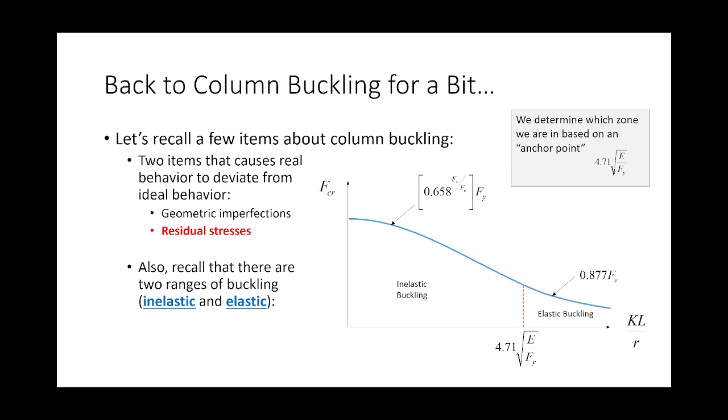Okay? Now, let's go back to column land. What were the two reasons that real behavior deviated from ideal behavior? Geometric imperfections and residual stresses. And the reason why I highlight the residual stresses is because residual stresses is what affects this. Elastic buckling is affected more by geometric imperfections because it's elastic. It doesn't have anything to do with locked-in residual stresses because we're not talking about yielding there. Okay, does that make sense so far?

Okay. Just keep that stuff in the back of your head, and now we're going to talk about LTB, okay? Now, if this is the AISC curve for column buckling, I am going to show you the AISC curve for beam buckling, okay? So we're going to talk about 3 zones of capacity and the anchor points that split them, and then we're going to talk about the effect of Cb and how Cb actually plays into things. So, if we look at the capacity of a W shape, it is split into 3 zones, not 2, okay?

So the way that we define that according to AISC is we have 2 buckling zones, like an inelastic buckling zone and an elastic buckling zone. But then we also have our zone at the very beginning, which is just the full plastic moment, okay? So in other words, what we have is our graph, right? And instead of a single point that defines whether or not we're in inelastic or elastic, we have 2, right? And so this right here is zone 1, this right here is zone 2, zone 3.

Okay? And zone 3 is our elastic buckling. Zone 2 is inelastic. Zone 1 is full plastic moment. Okay? And so where these are split up are by what are called these anchor points. So if you remember, let me erase these right here so we can kind of see this. If you remember, we're trying to look at LB plotted against MN. And so we split these up by these anchor points, LP and LR.

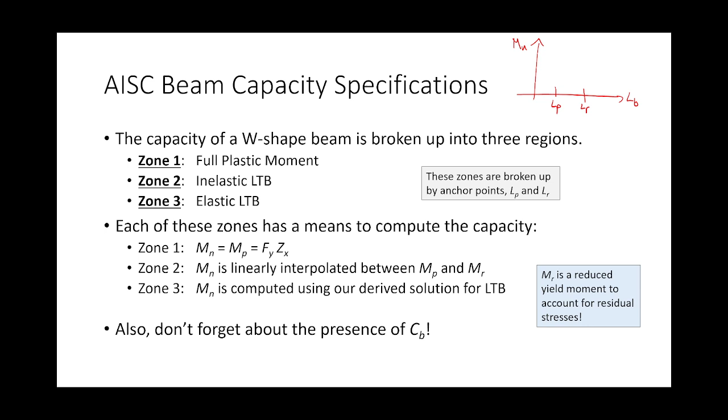Zone 2 is a linear relationship. It's a linear fit between MP and this term MR. And what is MR? It's just the yield moment that's been reduced a little bit. And so we reduce it 30% to account for the presence of residual stresses. So that's what MR is. So if MP is FYZX, MR is FYSX times 0.7. That 0.7 is not a safety factor. If you get asked, no, it's not a safety factor. It's accounting for the residual stresses locked into the shape. Okay? Make sense?

Okay, now this is a line. Lines are defined by slopes. We call the slope of that line the beam factor. And so all the beam factor is just change in y over change in x, and so you can compute that pretty easily right here. Zone 3, this is the elastic LTB curve that we previously derived. It's written a little differently, but it's the same solution. Okay, I want to stop for a sec to see if this makes sense.

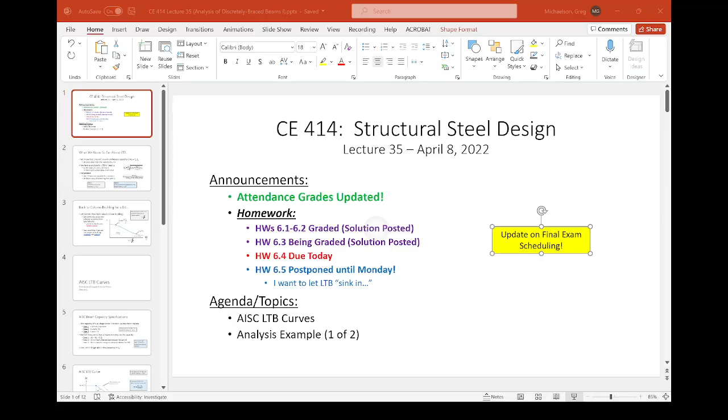Remember I told you there's all those values that, oh, we'll use them. We're using them. Isn't that exciting? The Zx tables. 6.78 for a W24 by 76. What do you want? The Lp. 6.78. Here, I'll write that on the board. Okay. So, Lp, and then Lr.

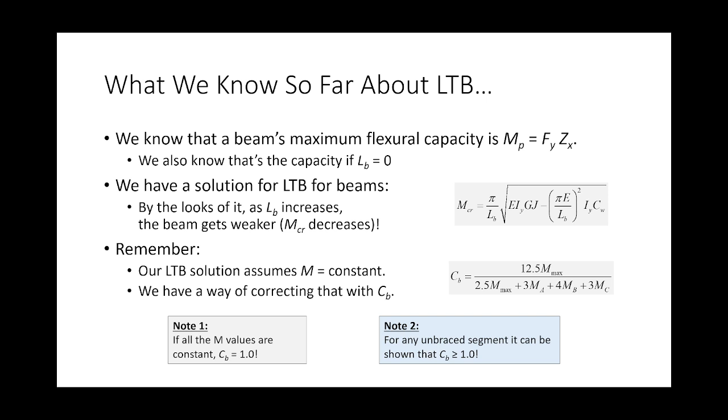Lp and Lr are what we call the anchor points that help us determine which zone that we're in. Lr is really nasty. Lp is actually pretty easy. What if I told you that it might seem counterintuitive, but it's actually much harder to derive Lp than it is Lr? Lr, while very nasty, is just algebra. All you do is, here's how you derive Lr. I'll tell you exactly how you derive Lr. All you do is you take this equation, set it equal to 0.7 Fy Sx, and just solve for L. That's all you do. It's nasty, and so you've got square roots inside of square roots, but that's it, right? All this 6.76, all that is just taking our material constants and coming up with some constant values to go for it.

I actually have a derivation of this. It's not hard. It's actually, I mean, it's algebra. It's a lot of alphabet soup, but it's not difficult. This is a little bit more difficult. You actually have to go and test beams and run a lot of analyses, and it requires some decision making in terms of where are we going to call the ball as to whether or not buckling's an impact or not. It's actually quite difficult to get that done well. But suffice to say, it doesn't really matter.

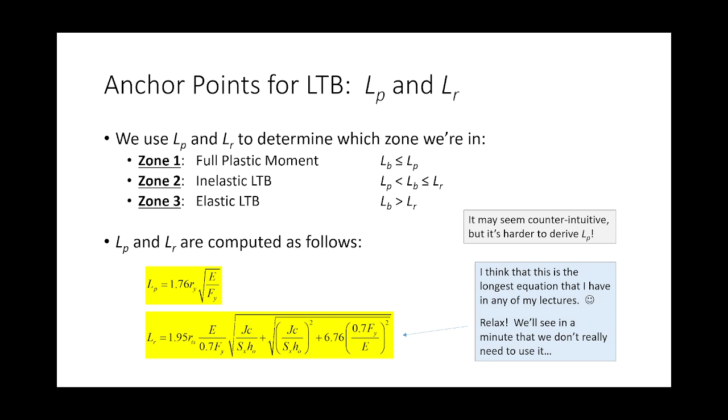It doesn't really matter because table 3-2 computes it for us. Now, zone 1 is easy. Zone 1 is just FYZX. Just plug and chug. Zone 2, however, is a linear interpolation.

Now, if you open the manual, this is what it looks like, right? CB times this quantity less than or equal to MP. So let's think about that. What's in the brackets is just the raw capacity, right? And so what the spec is saying is, what you need to do is multiply by CB, but I don't care what CB does, you're taking the minimum of that and MP. That's what you're doing.

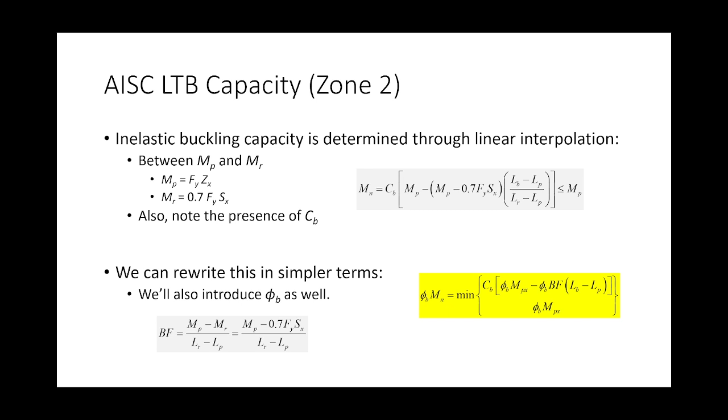So, what the spec also does, makes our life a little easier, is what we go from here to here. This BF term is just the slope of that line. We call it a beam factor. And so we can take this equation and simplify it a whole lot with this. For table 3-2, do you see beam factors listed? Look at that. By golly gosh gee, there's some BF values listed. It's almost like the manual's trying to make it easier on us. This is what you spent your money on, because if not, you'd have to compute this for every beam, and it'd be a pain, believe me.

So, zone 3 is our LTB, our DiffEQ solution. It looks different. I'm going to tell you why it looks different. The reason is that this solution is really derived specifically for doubly symmetric I shapes, like wide flanges, right? So a W24x76 is doubly symmetric. It's the same size top and bottom flange. That's fine. But for bridge plate girders, for example, you will have different size flanges, okay? And suddenly, the solution that we derived doesn't quite work.

But you do a little bit of algebra, a little bit of analysis, and what you find is that there is a similar solution that looks a lot like this that's in the bridge spec. So the reason they reformulated the expression a little bit is so that when you are designing a plate girder for a bridge that's singly symmetric, and you look at the expressions, they're very, very similar. So it's a lot easier for you to pick up how to do bridge calculations as opposed to building calculations. Now, a couple things to keep in mind. Number one, there really isn't a pretty design aid for this one. You kind of just have to chug your way through it.

There are more properties that you are going to need, but you can look these properties up in table 1-1. You do need the torsional constant. You need the section modulus. There's a couple other things that you need. One of them is H0. H0 is the distance from center of flange to center of flange, so it's a lookup. You can find it in table 1-1. And then also RTS. RTS is sort of a radius of gyration for LTB. It's kind of like a torsional R value. Again, it's just a lookup.

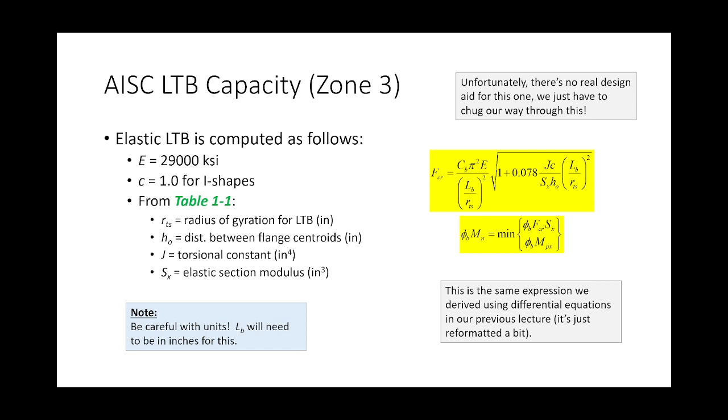It's plug and chug. When you're using this expression, be very careful with units, right? Because RTS values tend to be in inches, and it's very common for LB values to be in feet. And so if you take LB over RTS, this needs to be in inches. So make sure that you're being cognizant of that. Okay, with me so far? Now, I think it's on the next slide.

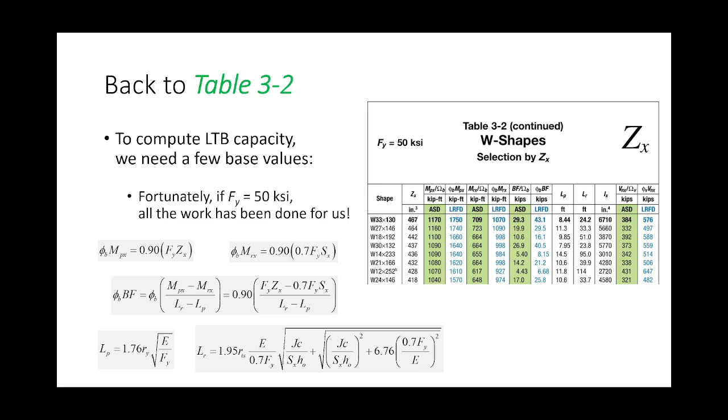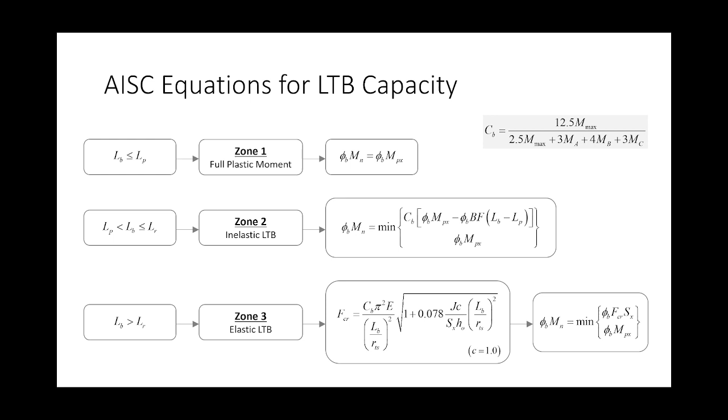Well, by golly gosh gee, it's almost like I planned this out or something, right? You know, look at me.

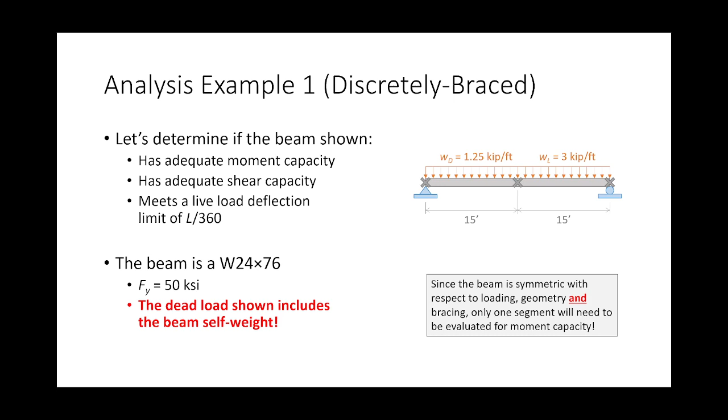Now, the dead load shown includes the beam self-weight. Since the beam is symmetric with respect to loading and geometry, we're only going to need to consider one segment. Let me put this in the notebook, and let's get rocking and rolling.

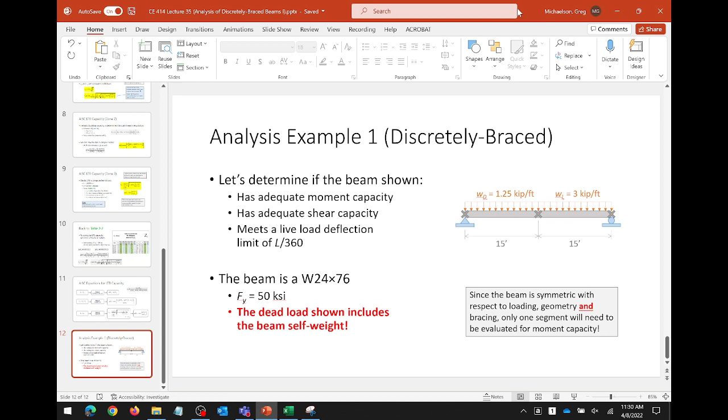Where's my, I'll just do it this way. Hold on. Let's see if it still works. I take the pen. Just think that's cool.

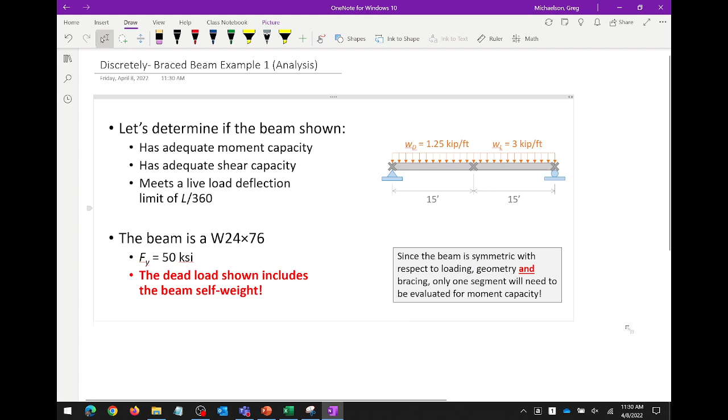Okay. I'll give everybody a sec to copy this down because this is kind of important. It's a simply supported beam with a uniformly distributed load. I wonder if anybody can tell me what CB is going to be for each of these segments.

This one's the 1.3. It was 1.14 for the whole, yeah. Again, it's like I planned that out or something. It's crazy, isn't it? Are you saying you plan the lectures? No, I don't. It's just serendipity. You're giving me way too much credit. I bet Alejandro does. Oh, yeah. I'm just taking credit for his work. All right. Get that out of the way.

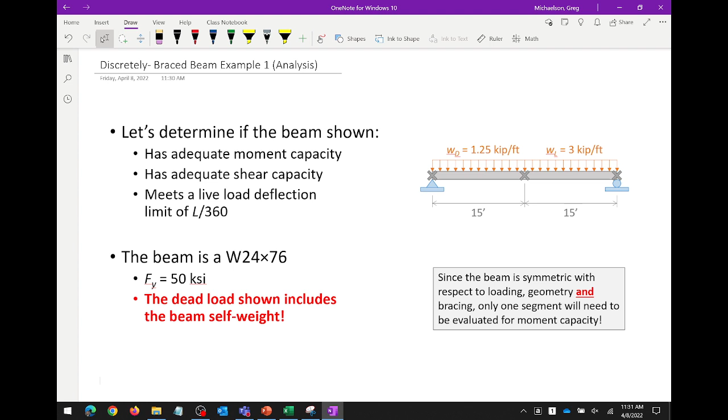Okay. So again, I'm not giving you a homework this weekend because I want this to seep in, and we're going to probably do some more examples to sort of flesh all this out. Now, let's look at the structural analysis component a little bit.

First off, this beam is simply supported, subjected to a uniformly distributed load. Did everybody find table 3-1? We didn't actually talk about it, but I did reference it on the homework. If you open up to table 3-1, it will list CB values for common cases, common instances of analysis loads. A simply supported beam subjected to a uniformly distributed load is among the most common. So CB for both of these segments is going to be 1.3.

So far, so good? Now, if we want to pull a sneaky, what we could do is look at this little guide, and we could probably use it to help predict what the capacity is going to be. But we'll go back to that. We'll see if this guide works, or maybe I made a mistake with putting the programming together. We'll see.

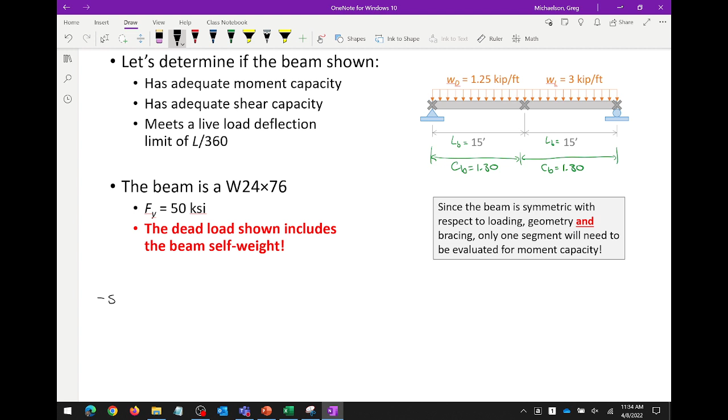So the first thing I'm going to do is go ahead and just factor the load, 1.2 W dead plus 1.6 W live. And this is a fine approach because both the dead load and the live load are both uniformly distributed loads across the entire span. Now, why am I not accounting for the beam self-weight right here? So I don't need to do that.

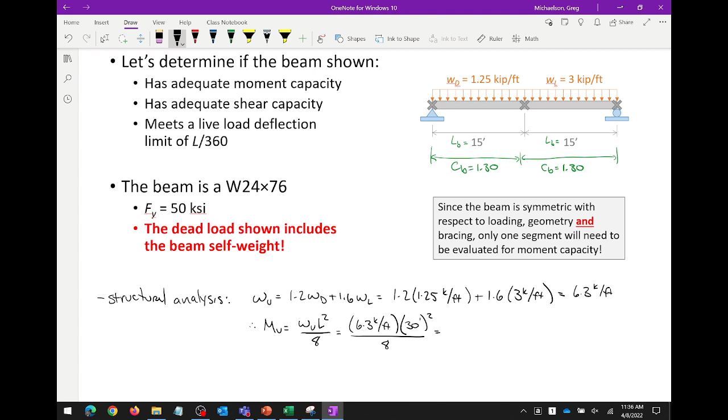So let's look at the capacity. We were given a W24 by 76. All right. So we're going to go to table 3-2. Okay, so the first thing I'm going to do is look up LP and LR. But by golly gosh gee, I already did that. And I got 6.78 feet, 19.5 feet. And from these, I look at my LB. My LB is 15 feet. What does that tell me? Zone 2. Right? And so what I can do, I can say, hold on, let's go to this.

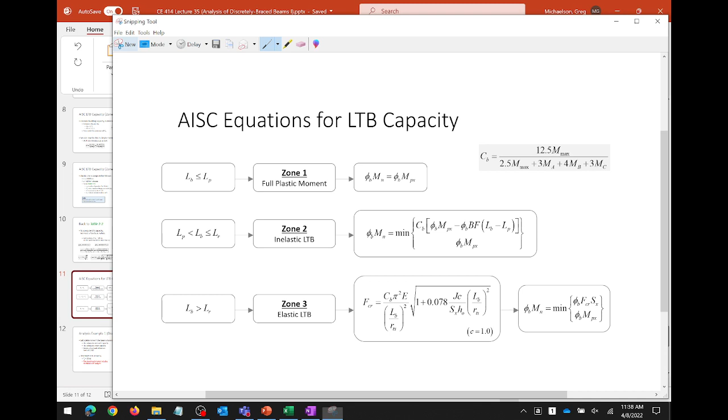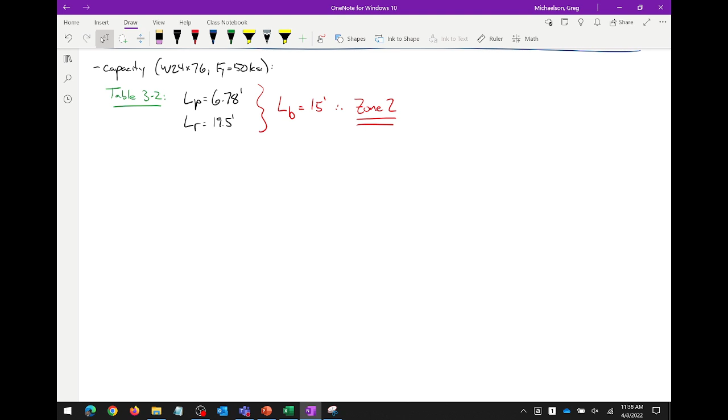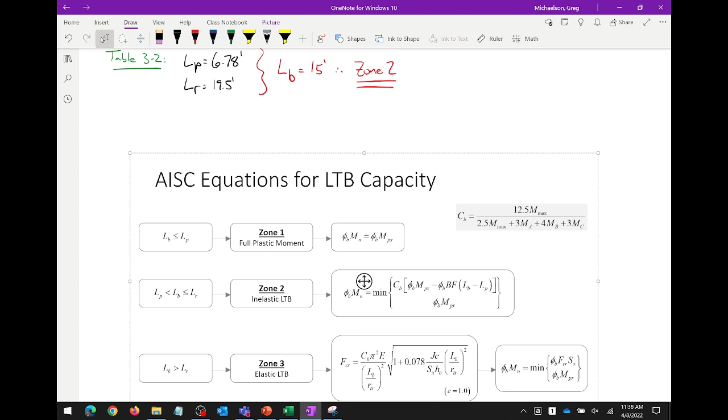All right. So we're in zone 2, right? Because LB is between LP and LR, what we're going to be using as a capacity check is this term right here, okay? So we need a couple of things. We need CB, we need phi b BF, phi b Mpx, etc. So how's this going to work? So what's CB? Well, that's 1.30. We just looked that up. What about phi b Mpx? What was that? 750.

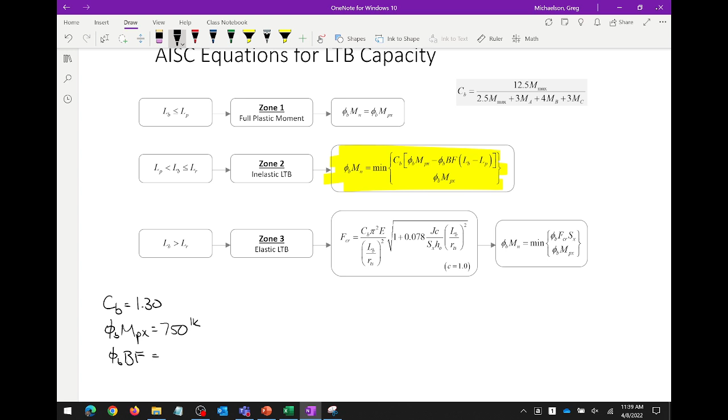What about this beam factor? What is that? And notice the units. 22.6 what? Kips. Because it's the slope of that line, so you take the moment over feet, so you get kips. And then we need LB and LP. So LB is 15 feet, LP 6.78 feet. So first thing I'm going to do is compute what's on the top row. So that is 1.3 times 750 minus 22.6 times 15 feet minus 6.78 feet.

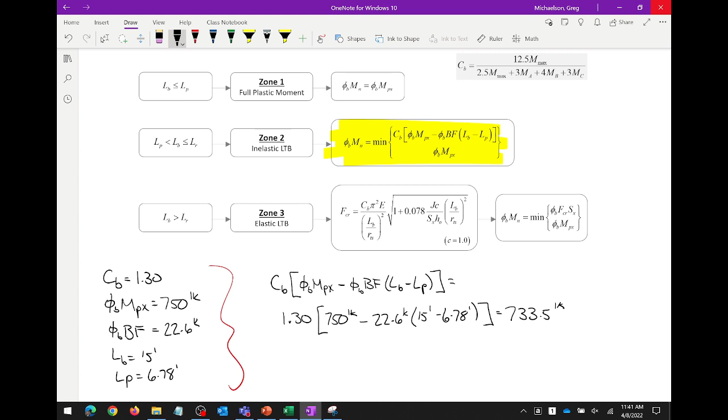And so what do we get for that? Second, how are we doing on that second? Because everybody brought their Casio FX115 ES Plus or similar scientific calculator, right? Everybody did, right? He got called out. Okay.

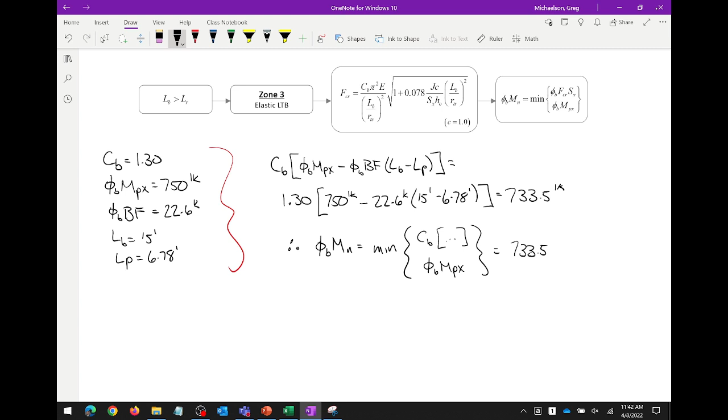Therefore, and this is how I'm going to do this because I don't want to have to write all this all over again. phi b Mn is the minimum of CB times all that stuff in the brackets or phi b Mpx. And what is that? It's the minimum of this or phi b Mpx, which is 750, which is 733.5. Right? Okay, does that match this? So CB is 1.3. Let me break out my mouse here. That's going to be so much easier to deal with.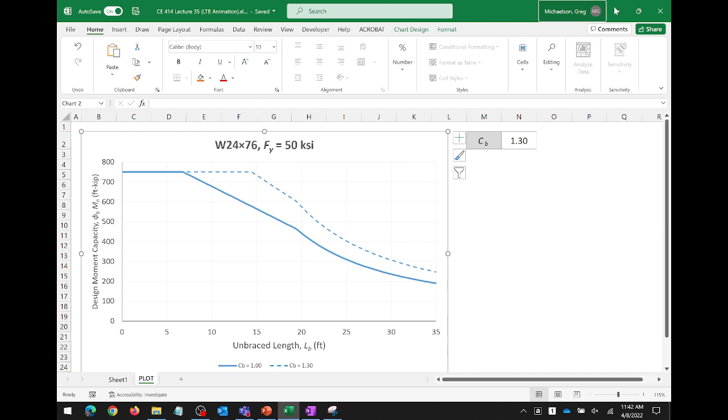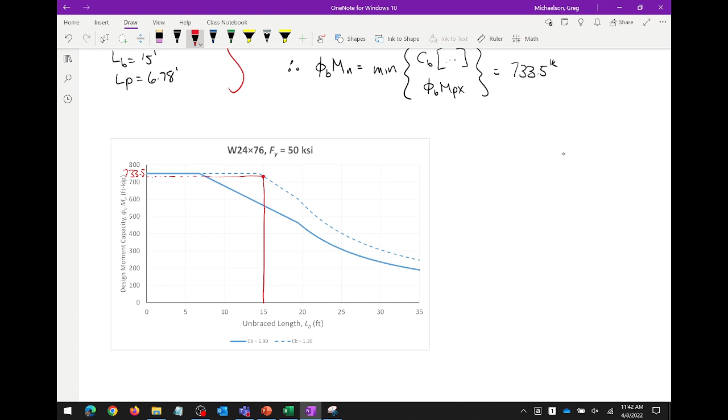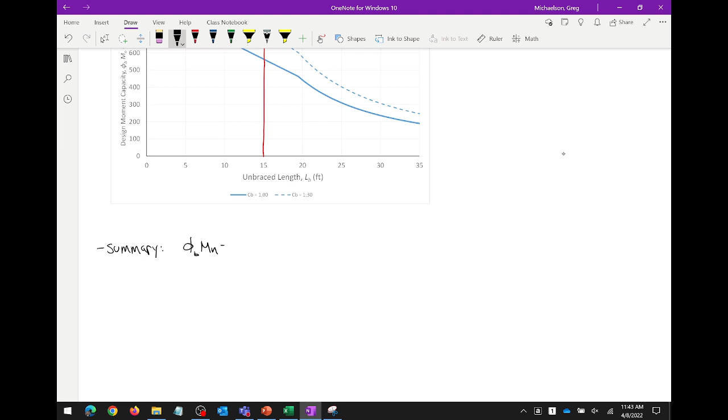So, and I'm going to put this on the notebook. So copy, paste. All right, so what do we got? LB is 15 feet. And so that's the capacity. And if I trace that back, it's about 733.5. It's kind of crazy, isn't it? It's almost like that worked or something. What do you think? So let me show you something, okay? So if I want to summarize, phi b Mn is 733.5. What was MU?

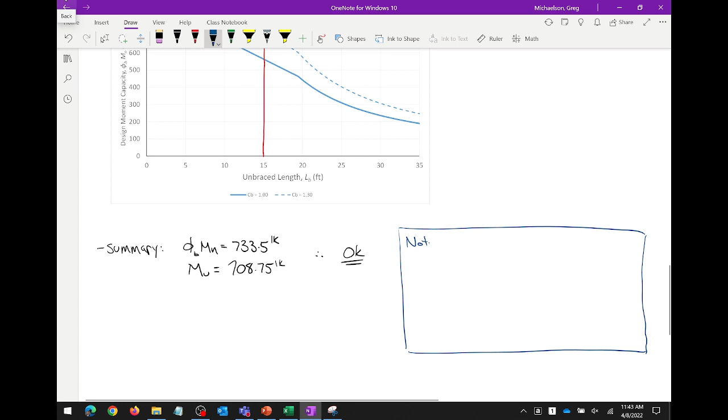708.75. What does that mean? Sufficient. It's fine, right? It has more moment capacity than needed. Now, I'm going to show you something. So this is okay. Now I'm going to show you something on the side. And admittedly, this is a bridge engineering term, but you'll get the idea. I'm going to show you what's called

a performance ratio. So I'll put it up here, performance ratio. A performance ratio is just an efficiency calc. So we say 708.75 over 733.5. Somebody tell me what that is. We'll say like, I don't know, 3 decimal places. 0.965. If this was a tension member, what would you say?

That's all right. Now let me show you something. Somebody tell me what is this for the W24x76. What is that? 315. And what was this? Is that okay? Yeah, that's way okay, right? Now, what's the performance ratio for shear? It's terrible, right? What does that come out to be? 0.3. Even? That's horrible.

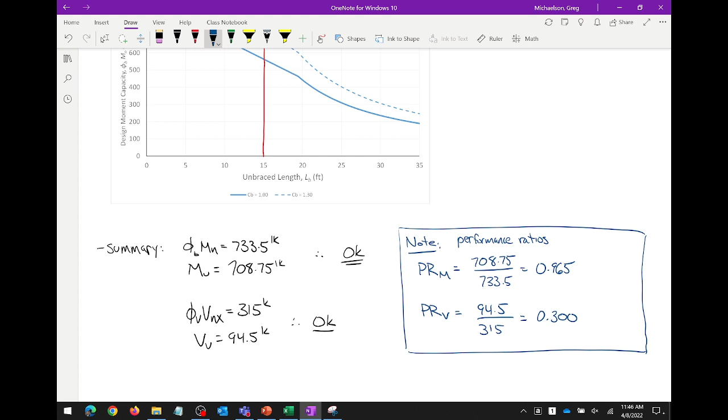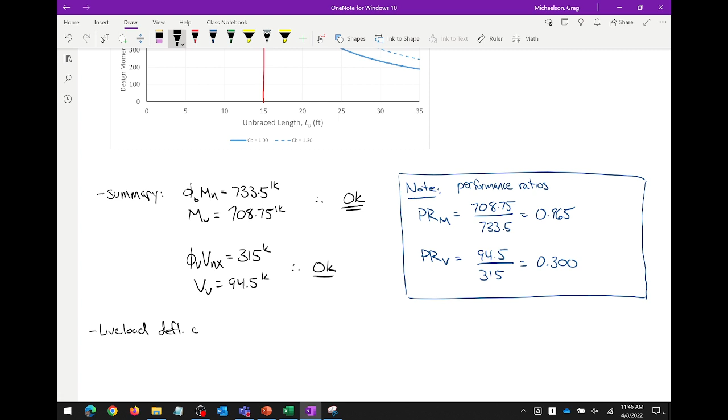With me so far? Now we got one more limit we need to check, and that's deflection. We haven't done that yet. Let's just make sure that we're good on that. That should be hopefully a simple check now. So I'm going to give myself a little room for that check there. So what was the limit for this problem? Remember, we got to convert that. So 30 times 12 is 360. 360 divided by 360 is 1 inch, right?

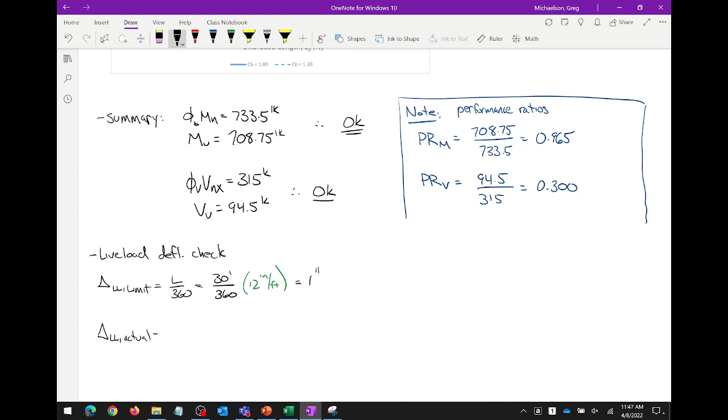And then our actual is, how do we do that again? Simply supported beam, uniformly distributed load. 5 w L to the 4th over 384 times E times Ix. Did you say 5? Well, you made 2 mistakes. It's 5 w L to the 4th. What was the distributed load? What was it? 3 kips per foot? And then, what do I need to put up here? There you go.

And what is Ix for this shape, by the way? What is Ix for a W24x76? 2100? Yes. It's almost like that table 3-2 has a lot of really good stuff in it, doesn't it? I'm telling you, I'm not kidding. It is one of the most useful tables in the manual. And so what do we get for this? Let's carry it out. All right. The reason why I'm doing 898 is because if I want to do a performance ratio for deflection, I might say 0.898 over 1, which is 0.898.

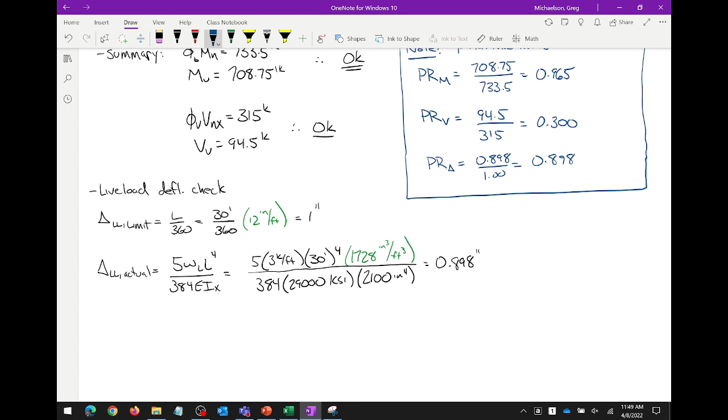Right? So if we collect all that, we look. The nice thing about performance ratios is that they're very, very useful to bridge engineers because bridge engineers have tons of limit states they need to check. They need to check different strength limit states, different service limit states. And so if you want to evaluate a design, you can just look at the performance ratios and they tell you everything that you need to know.

So I have this problem and I look at this beam and I go, okay, we have a beam that has more than enough shear capacity. Don't even need to think about it. Move on. And then we look at moment and deflection. We see they're pretty close. But which one controlled the design? Which one affected the actual selection of this beam at the end of the day? It was the moment capacity, because that's the one that has the highest performance ratio, right? Whereas if the numbers were reversed, we would probably have picked this beam just straight based on its moment of inertia. We would have had to check the moment capacity, but we would have found it probably didn't govern. It was the deflections that governed. Does that make sense?

So those are what are called performance ratios. And sometimes if you hear me use that term performance ratio, it's just sort of a dimensionless, standardized means of looking at performance. And 3 decimal places is very common. A lot of software packages, that's how they spit it out. Sound good?

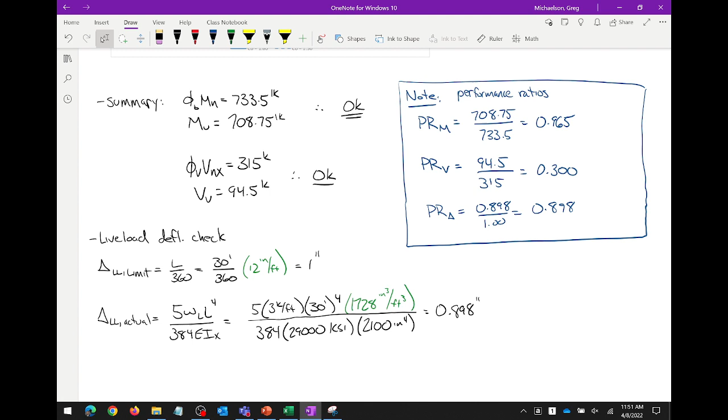You sure you don't want a homework assignment this weekend? It's like, we don't want you to have to come up with a solution and an assignment. Yeah. Don't rub it in. Yeah. All right, you all have a wonderful weekend.